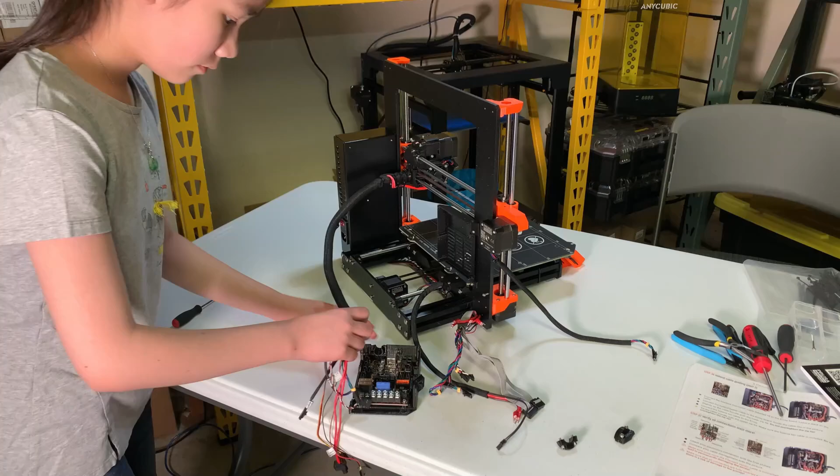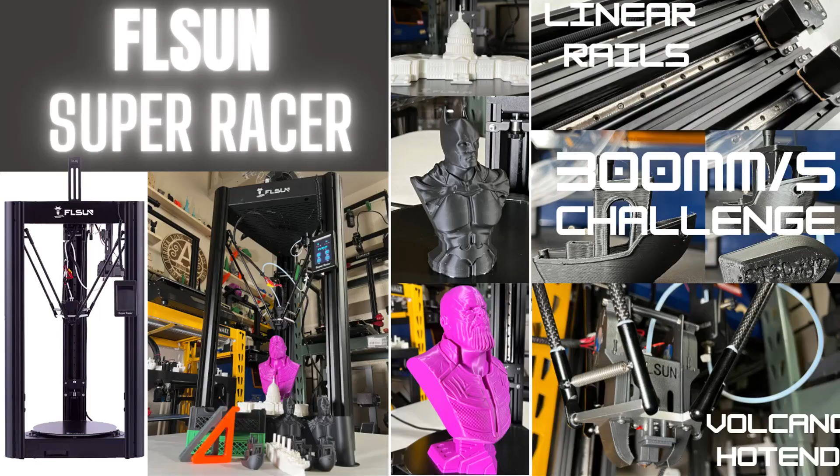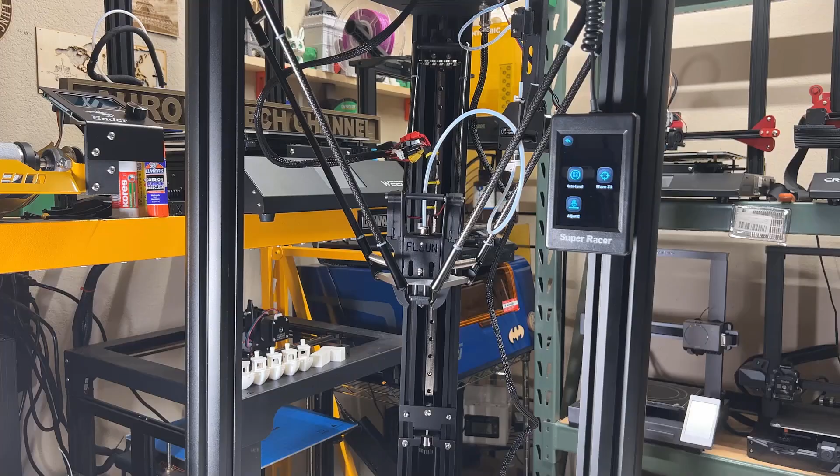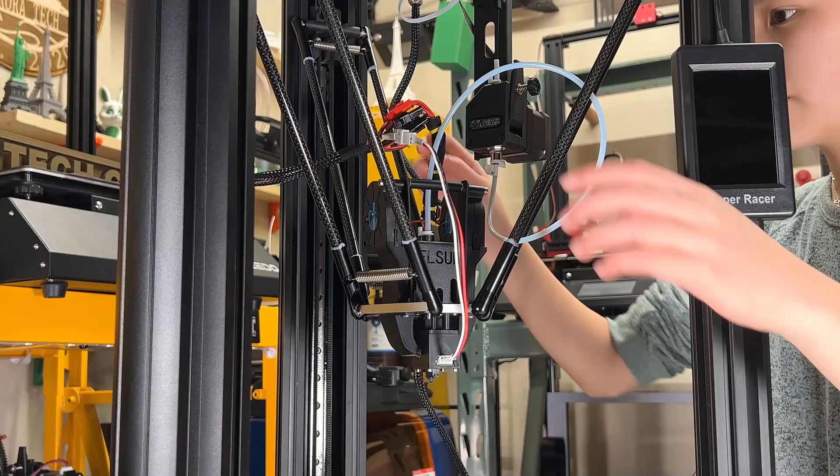Today, I'm going to test out the FLSUN Super Racer, which is a Delta 3D printer that comes with some really good hardware, including linear rails on all X, Y, and Z axes, a BMG-style dual-gear extruder, a dual cooling fan, a volcano-style hotend, a DWIN capacitive touchscreen, a removable auto bed leveling sensor, a filament runout sensor, a 32-bit board, and TMC 2209 silent stepper drivers.

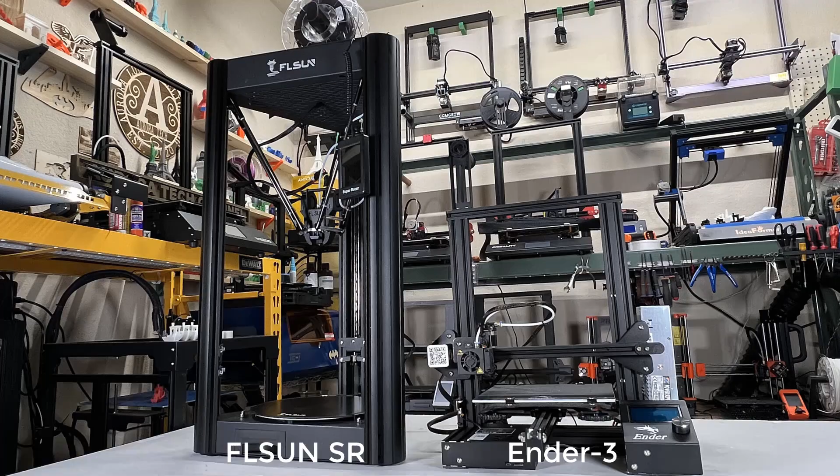The diameter of this print bed is 260, and the maximum Z height is 330 millimeters. The machine is almost 1 meter tall, and it's an overall really interesting looking printer.

As this is a Delta printer, the main reason we want a Delta is to be able to print fast. So we normally won't see a direct drive extruder on a Delta, as we always want the print head to be lightweight in order to print fast. This means that not adding the extruder and the stepper motor to the print head of a Delta is a good idea.

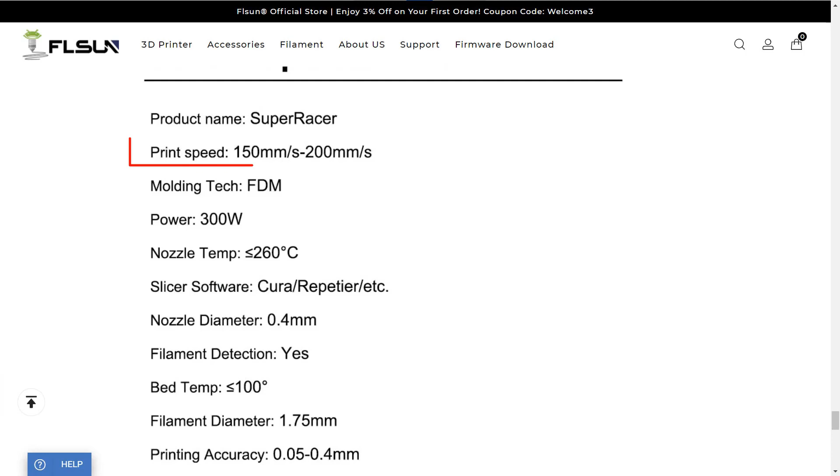The manufacturer claimed the normal printing speed of this printer is 150 millimeters per second, and it can even print at 200 millimeters per second. I will push this printer over its limit to 300 millimeters per second and see how it handles that.

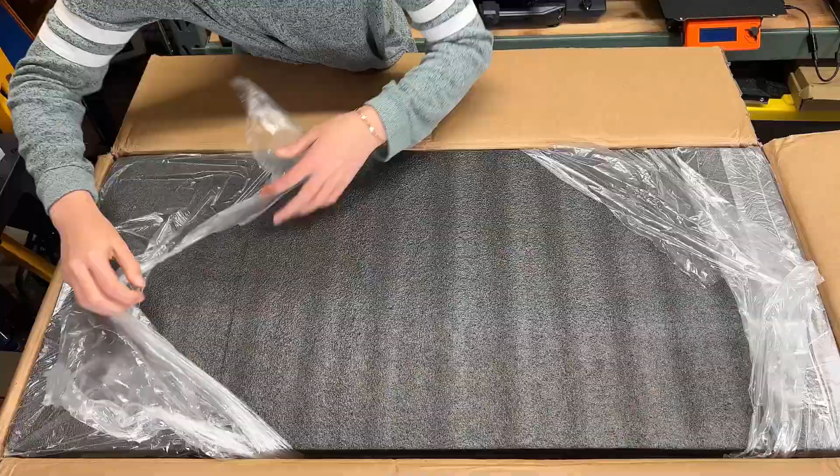We have the base, the top, a touchscreen, 3 long extrusions with linear rails, the extruder, hotend, bed leveling sensor, filament holder, 3 sets of parallel arms, and some tools.

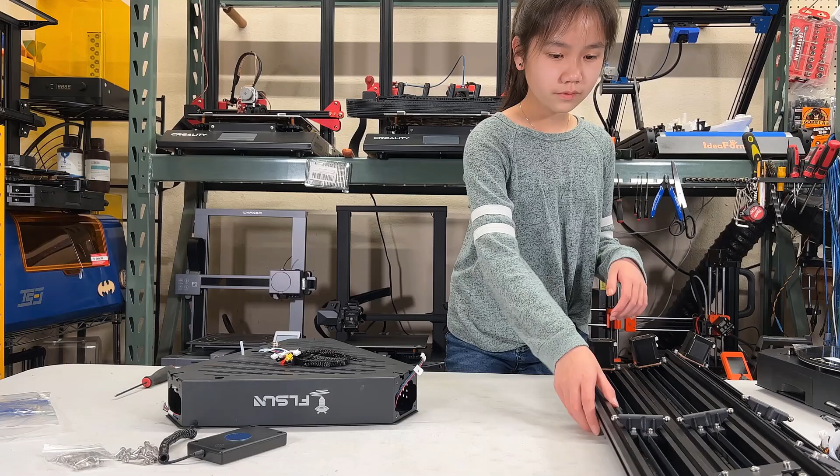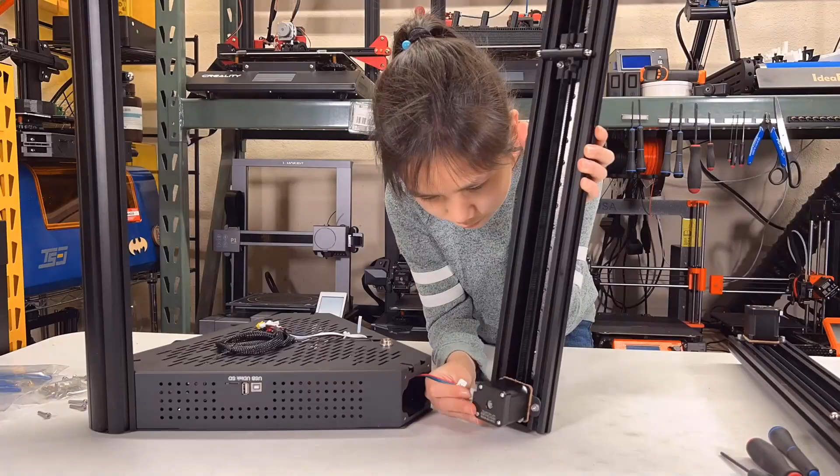First, we will install the long extrusions at the top in an upside down orientation. These axes are labeled as X, Y, and Z, but since they're using the same stepper motor and linear rails, they should be the same no matter which one goes to which. However, I will just follow the label and use 4 screws to secure each corner.

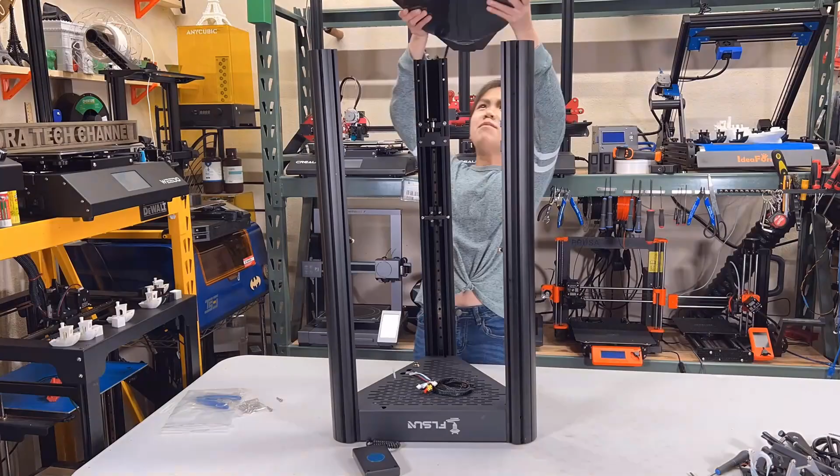Next, put the base with the print bed at the top. We are still working on this with an upside down orientation. Use another 4 screws at each corner to secure the extrusions on the base.

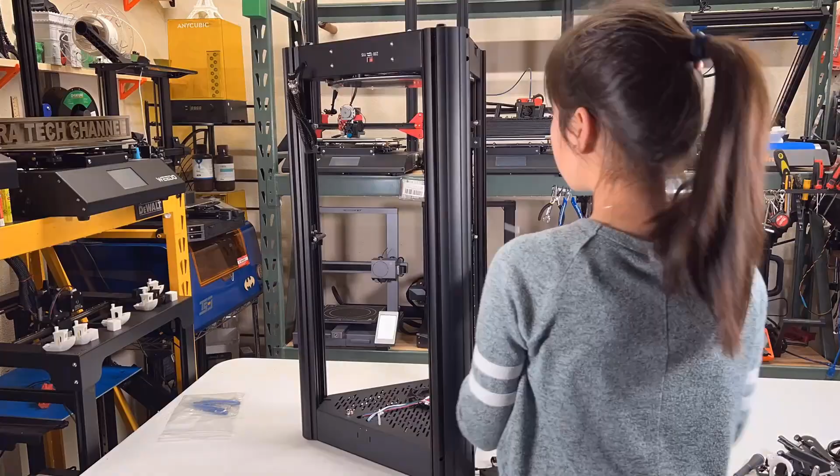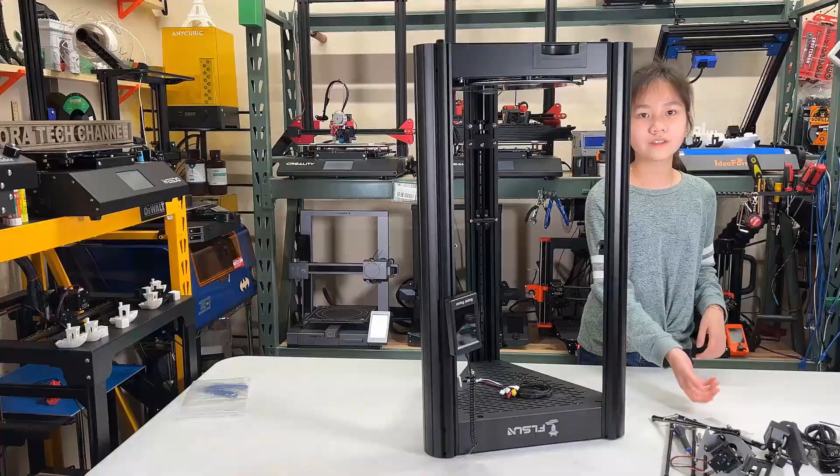Then, slide in the touchscreen mount to the slot in the extrusion on the left. Use the screen to check and make sure the cable is long enough without being stretched too much. Now, we can flip it back to the normal orientation.

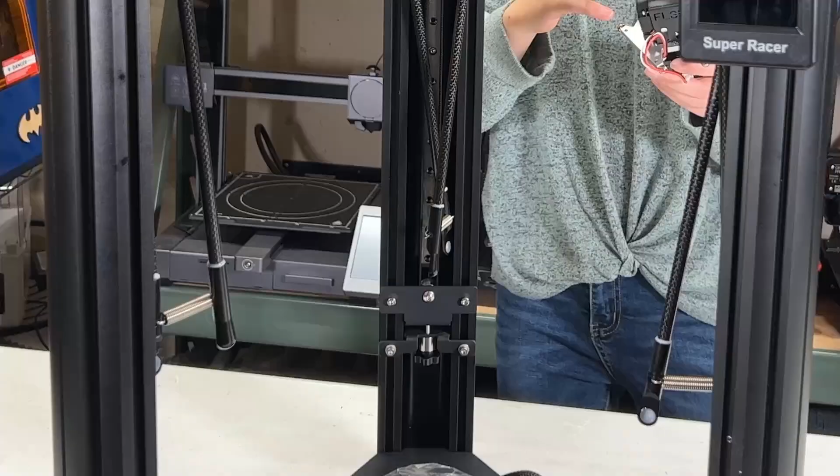Attach a set of parallel arms to each axis. Just snap it in, no screws are required. Grab the print head and snap the other end of the arm on it. It should be able to move freely.

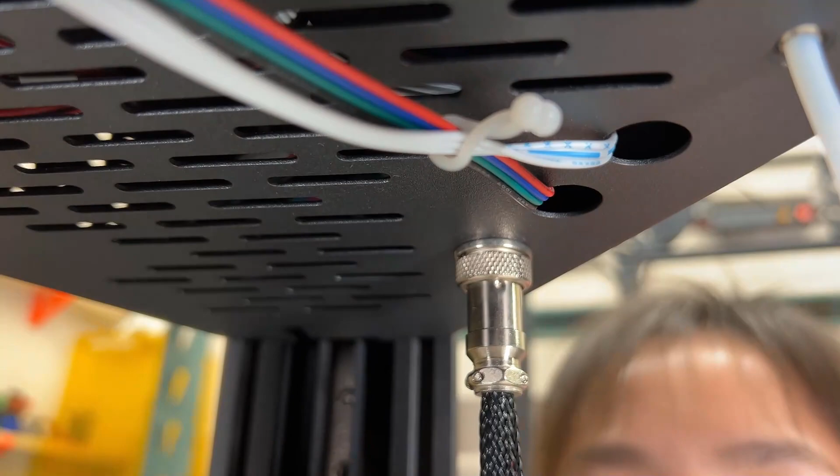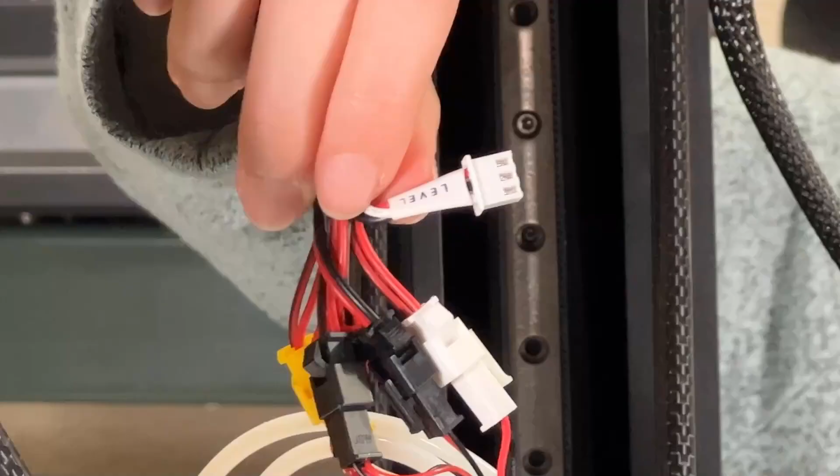Next, connect the cable with the long black sleeve from the base to the top and secure it. Connect the set of cables from the top to the print head following the color on the connectors. Red is the heat cartridge, yellow is the thermistor, the 2 black cables are for the dual fan, the 1 white cable is for the heat sink fan, and the final cable remaining with the level label is for the bed leveling sensor. This sensor is only required once in a while when you do auto bed leveling.

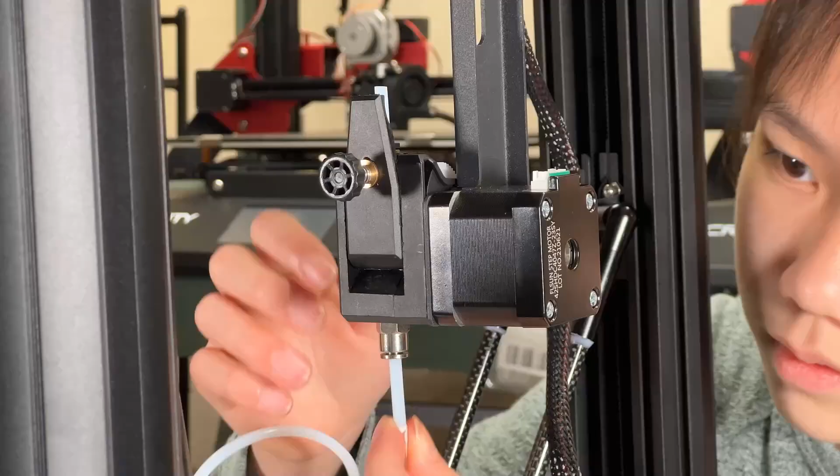Then, hang the extruder and filament sensor assembly on the right side of the frame and secure it with 2 screws. Connect the Bowden tube from the print head to the extruder and push it in all the way, making sure the label touches the metal coupler. Connect the cable of the filament sensor, followed by the extruder stepper motor.

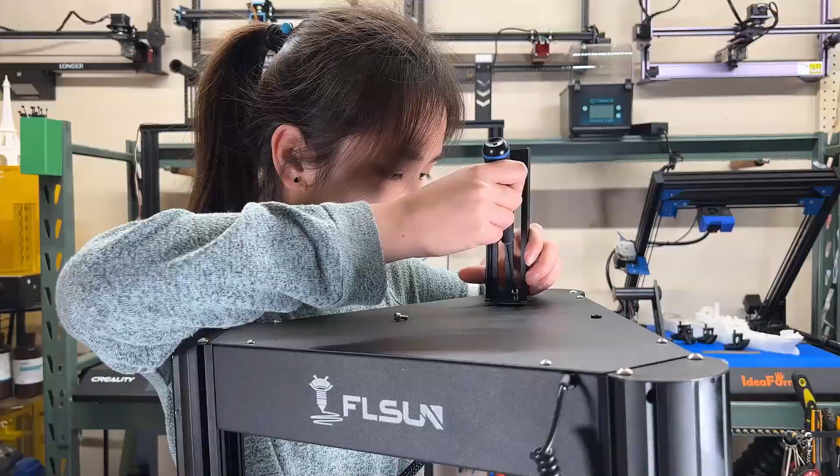Mount the filament holder at the top, load some filament, check the voltage, and we can now turn on the printer. The menu looks pretty nice.

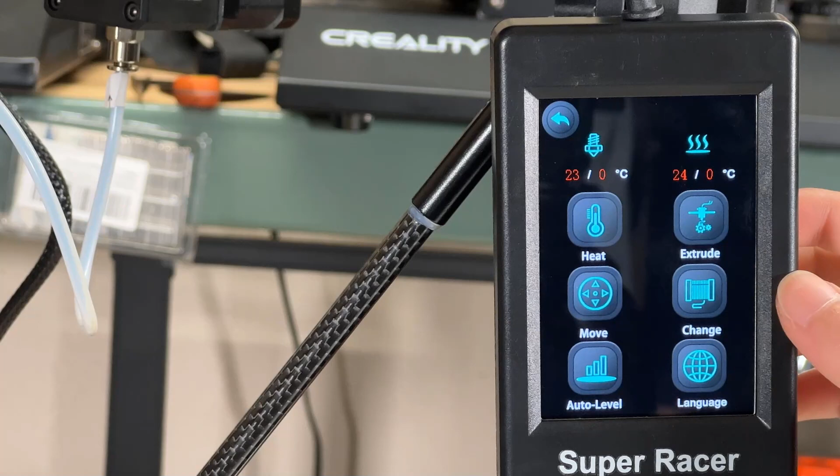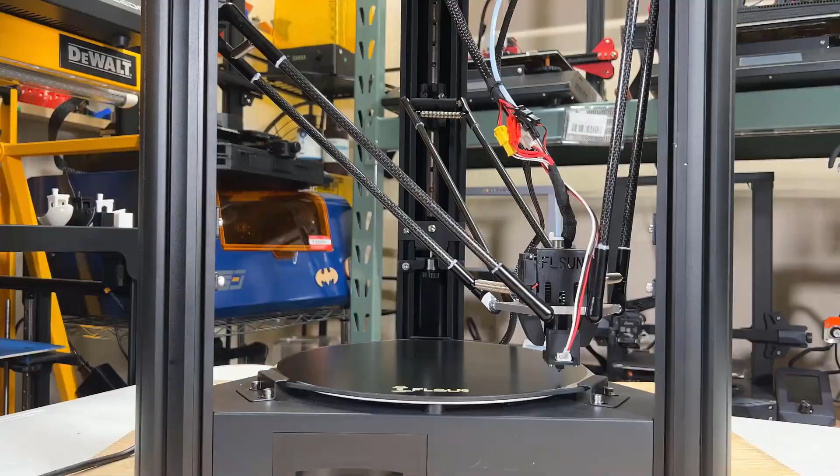Let's start with doing auto bed leveling. Go to Tools, Auto Level, and select the Auto Level button again. The sensor is already connected, so select Yes to start. It's going to probe the center and the 3 points near the X, Y, and Z axis. Then it homes itself again and probes 21 points on the bed.

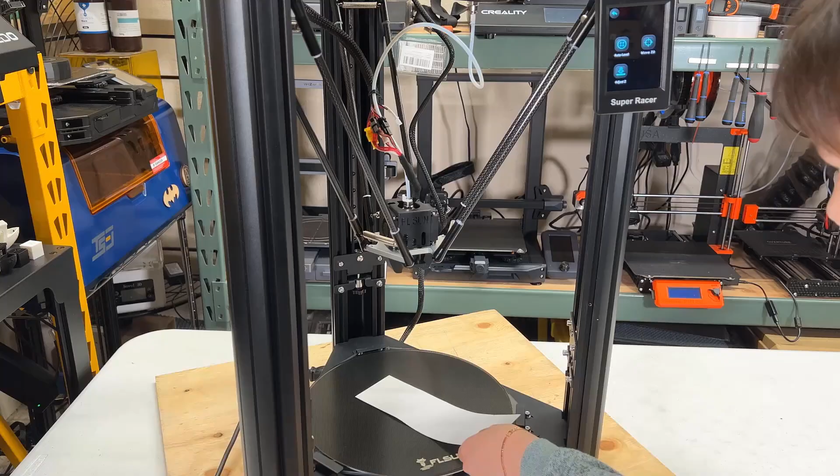We can now remove the bed leveling sensor and adjust the Z offset. Press Move Z0 and the print head will move to the current 0 position of the Z axis. As the nozzle is too far from the bed, press the Adjust Z button, do the paper test, and keep moving the nozzle closer to the bed until it slightly scratches the paper. Then select Save to save the Z offset.

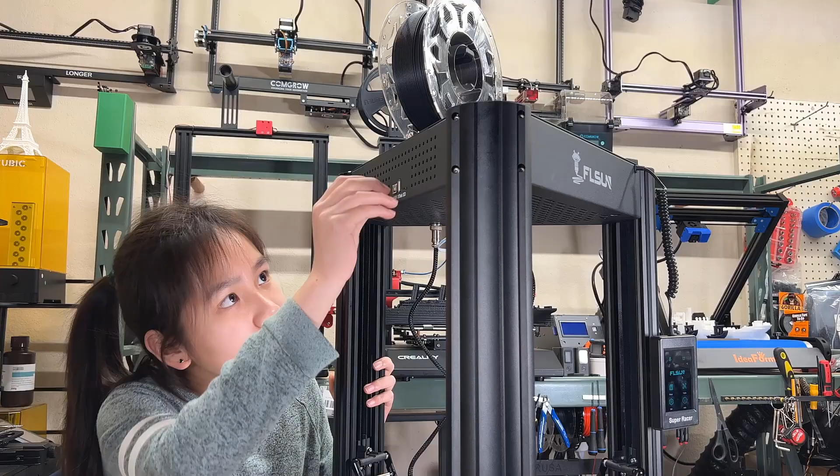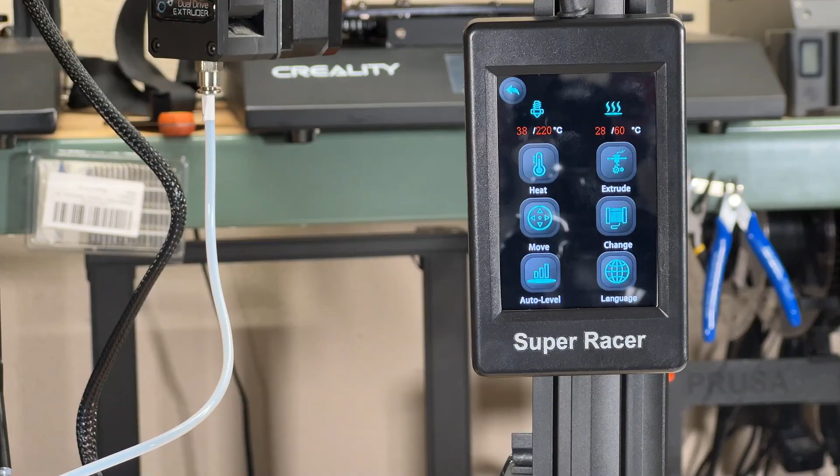Let's insert the micro SD card and prepare for our first test print. Select Tools, Heat, and PLA. It will heat up the nozzle to 220 degrees Celsius, which is 20 degrees higher than normal, but as we want to print at 150 millimeters per second, we need a higher hot end temperature to melt the plastic fast enough to keep up with the speed.

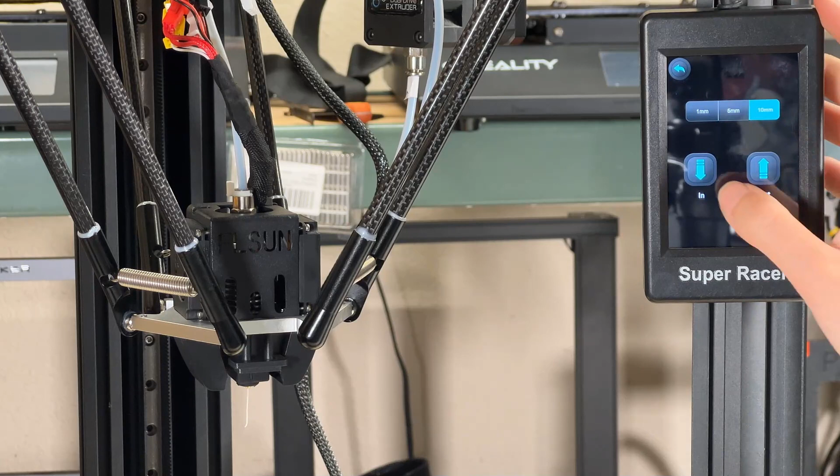As I already inserted some filament, I will just select the extruder and press the in button a few times. Okay, the dark filament is coming out from the nozzle. Let's see what Gcode files are available on the micro SD card. There is only one testing Gcode, and I will just print it to make sure everything is working.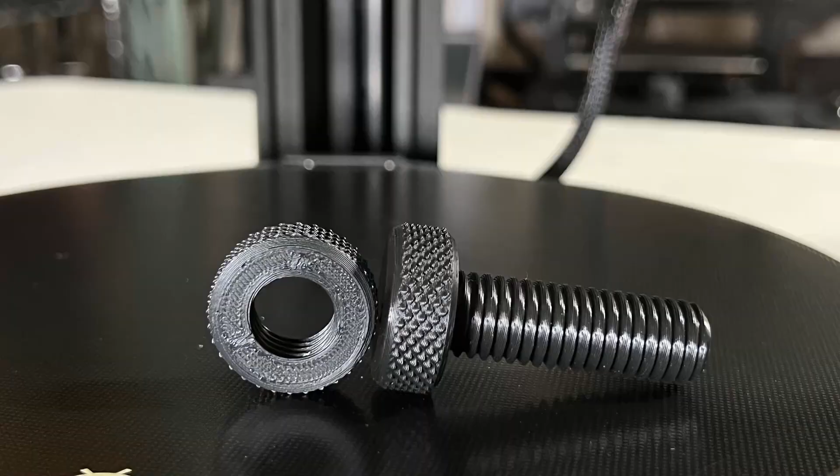It's a set of bolts and nuts. It took 40 minutes to finish, and they fit together very well.

Next, I will go to my computer to set up this printer in Cura. Select Add Printer, Non-Network Printer, and we have FLSUN and the Super Racer here. Let's start with the calibration cube.

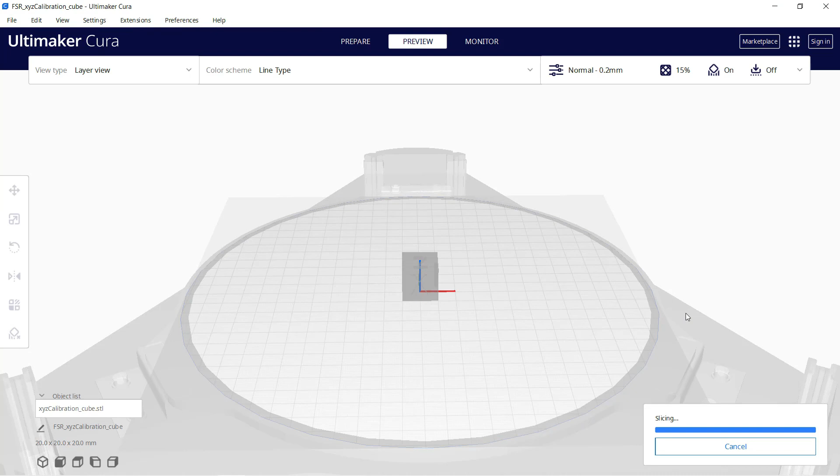Just use the default profile, except we don't need support. The print speed is 150 millimeters per second, with the first layer at 25 millimeters per second. Everything else looks fine, so let's print it.

The print head is moving fast, and the screen is also showing the real-time print speed.

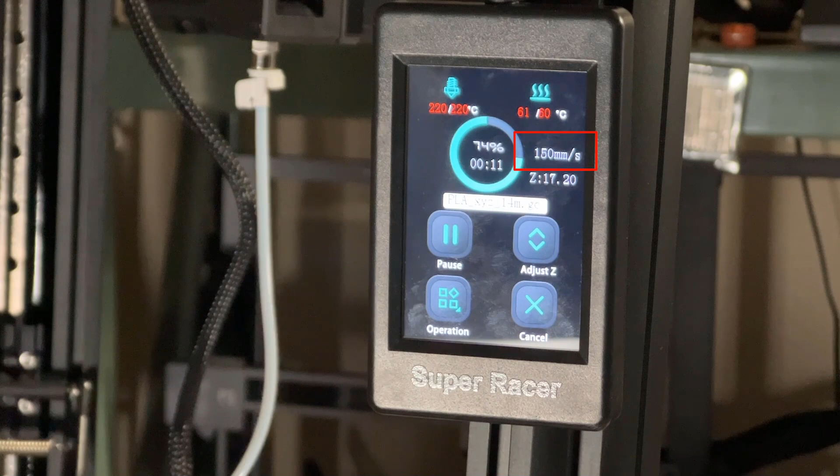Let's compare the one printed with an Ender 3, which used 30 minutes, and the Super Racer 14-minute cube. There is some ghosting on the Super Racer cube, as we normally don't print at this high speed if we have text on a surface. Besides that, the layer lines are looking better than the one printed by an Ender 3.

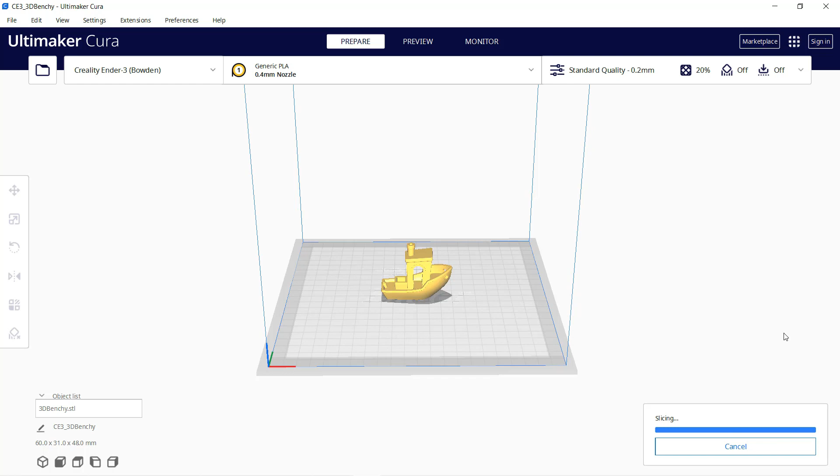Then, I will print a 3D Benchy with the same default profile. It only takes 45 minutes, which is very fast compared to an Ender 3 default 50 millimeters per second profile, which would normally take 1 hour and 50 minutes. Let's see if this printer can really complete the print in 45 minutes.

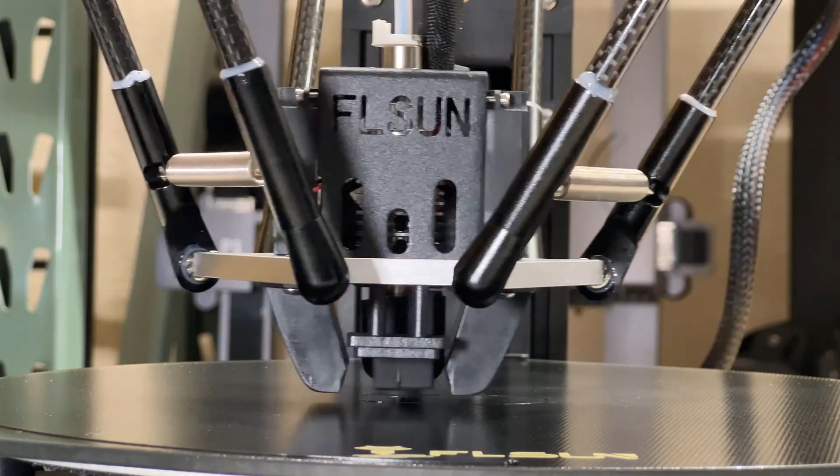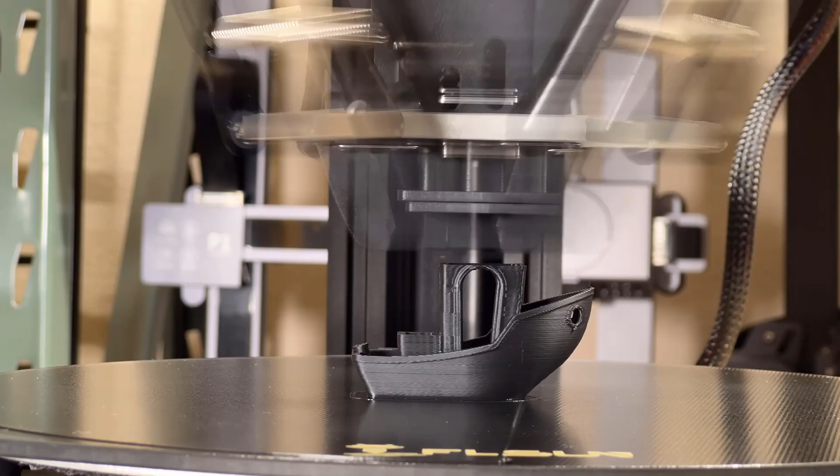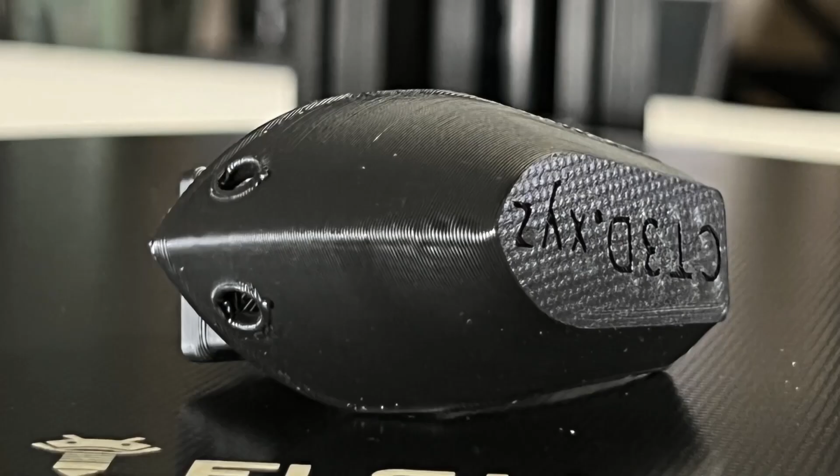It's quite impressive, taking exactly 45 minutes, and it's a very decent Benchy. The only minor issue I can see is that the cooling of this part is not enough. As you can see, the stock fan duct is a little bit too far from the nozzle and is blowing directly on the silicone sock instead of the nozzle. It would be better to extend the length by 2 millimeters and move it even closer to the nozzle.

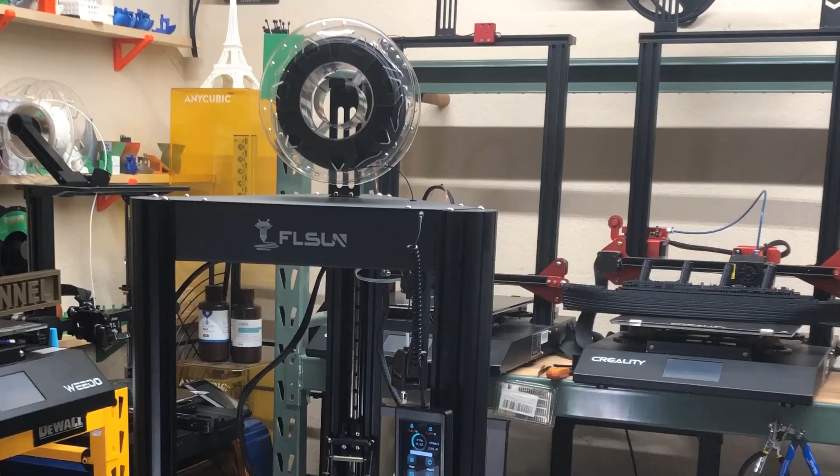Another thing I would like to print is the filament roll. The super simple filament holder works okay, but I would rather let the filament spool sit on a round-shaped roller, so I will print a set of fan ducts and a filament roller and see if they work better.

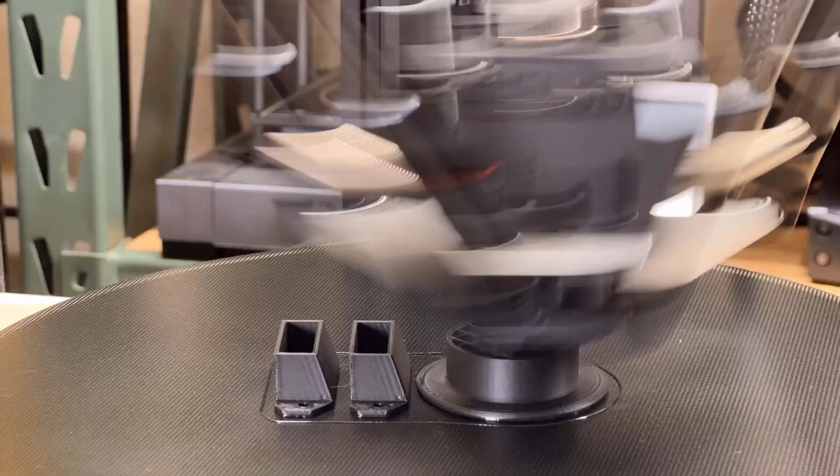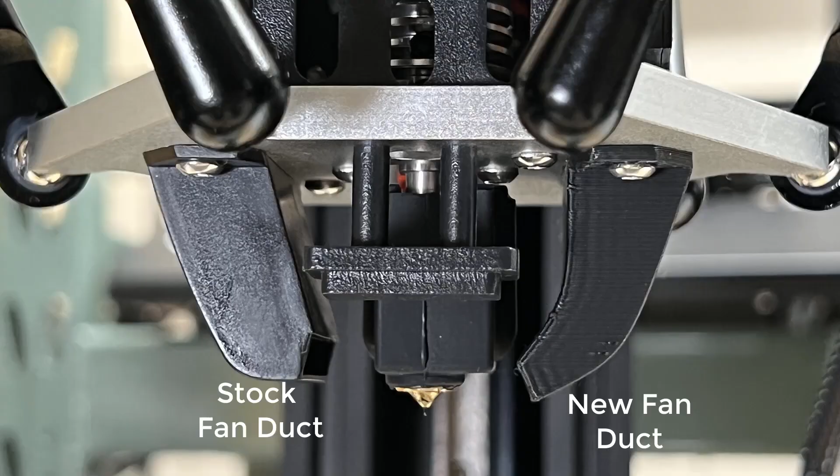The length and the angle of this set of fan ducts looks much better. I put one of them on the print head, and you can see the angle and height is more optimal than the stock one. The filament roller also seems better. I will replace both fan ducts and reprint the Benchy.

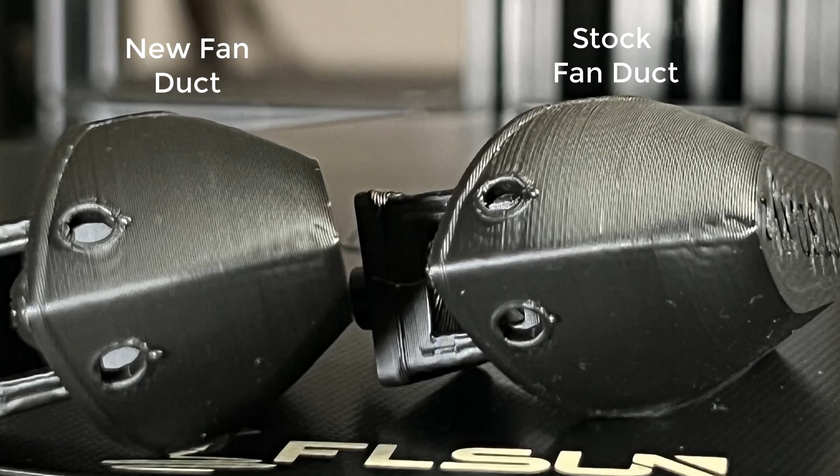Both Benchies look really nice. When you look at the front part, the cooling is much better now. I will keep this setup and do more test prints.

Next, I will print this Batman model. Generally, using an Ender 3 to print this model would take more than 5 hours. This Speed Racer only needs 2.5 hours.

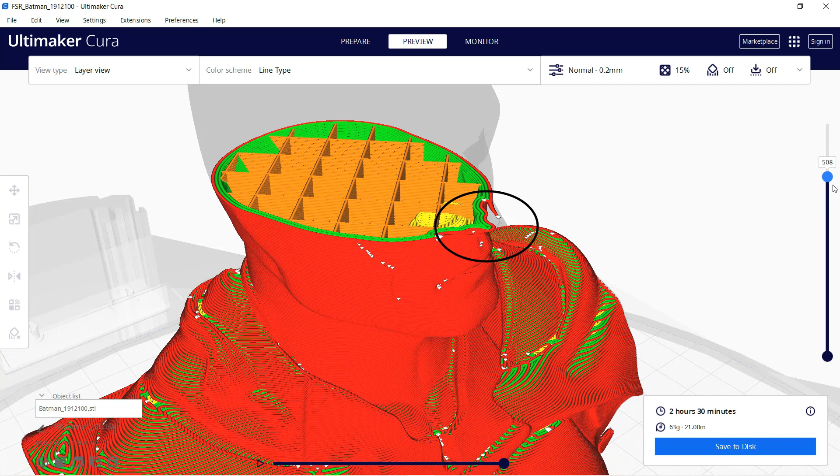This model will be fine without supports, except for the nose. As you can see, this layer will be printing in the air, but let's print it without using support and see how it looks.

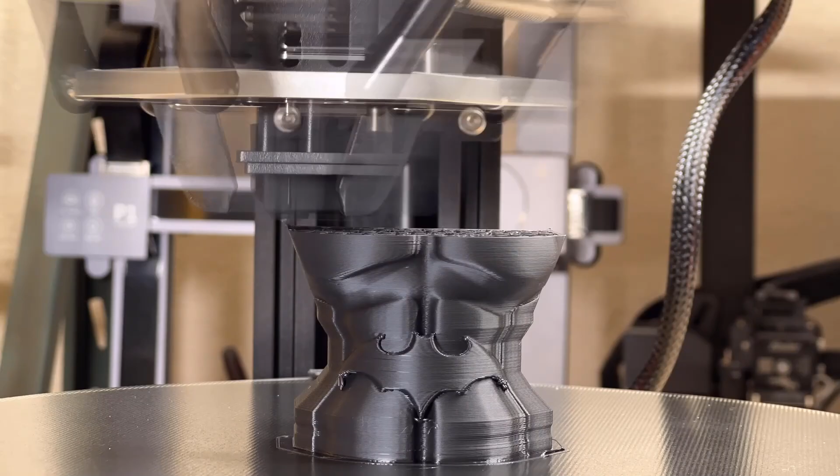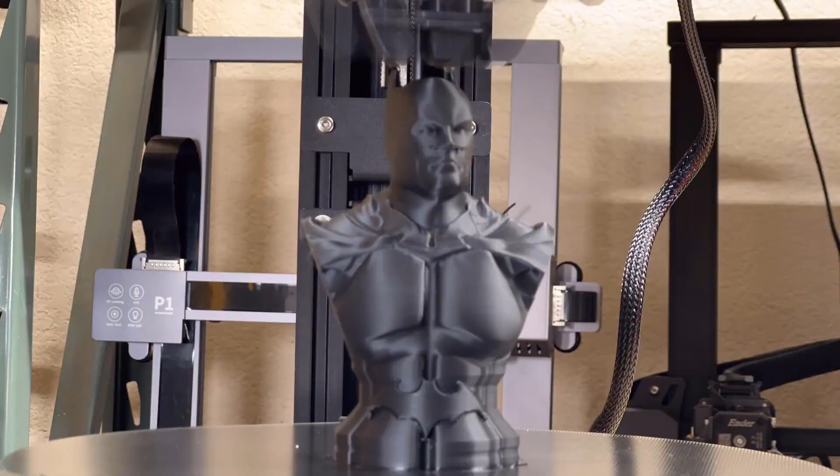The body looks perfect, and the layer lines are really nice as the base of this printer does not move, which can really improve the stability. As expected, the nose is not looking very good as this part was printed in the air, but overall this model is still a pretty nice print.

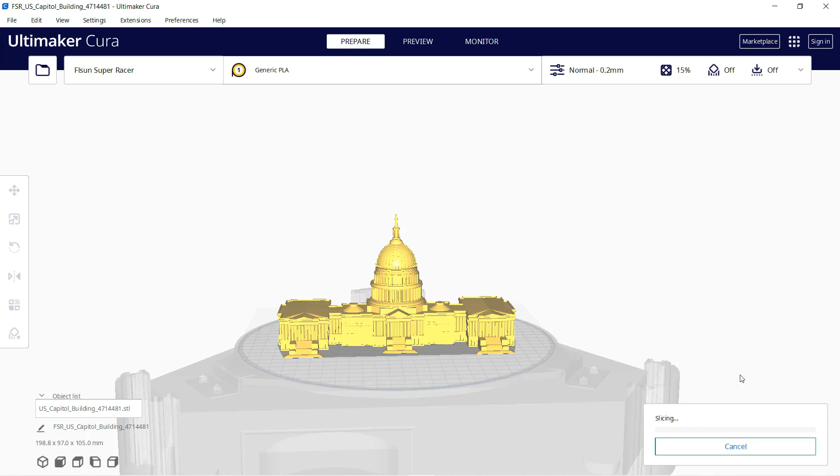Then I will print the Capitol Hill. This model will take 6.5 hours even with this Super Racer. Let's see how much time it takes with an Ender 3.

The print bed of the Ender 3 is not large enough, so I will reduce the size slightly to 98%. It still takes almost 11 hours. So let's switch back to the Super Racer and slice this file.

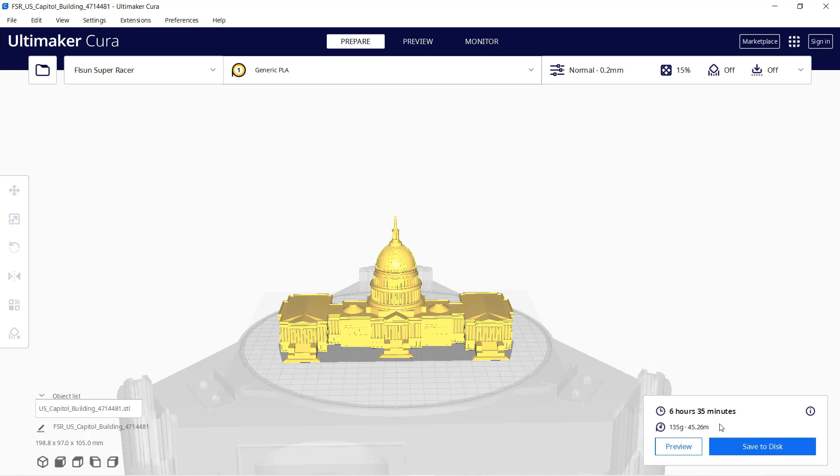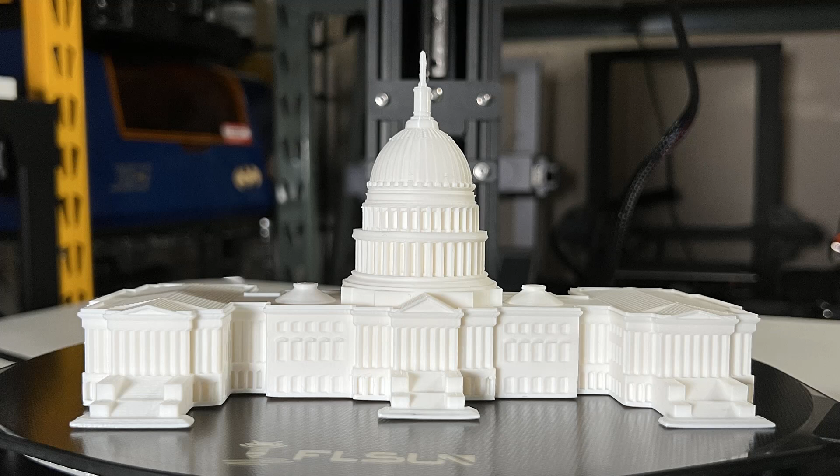With a model that is as wide as the Ender 3 print bed, just using 6.5 hours to print with this print quality is very impressive.

Afterwards, I will print this Thanos model, which will take longer than 29 hours on an Ender 3, and I never had the patience to wait for that, but using the Super Racer can cut the print time by more than half.

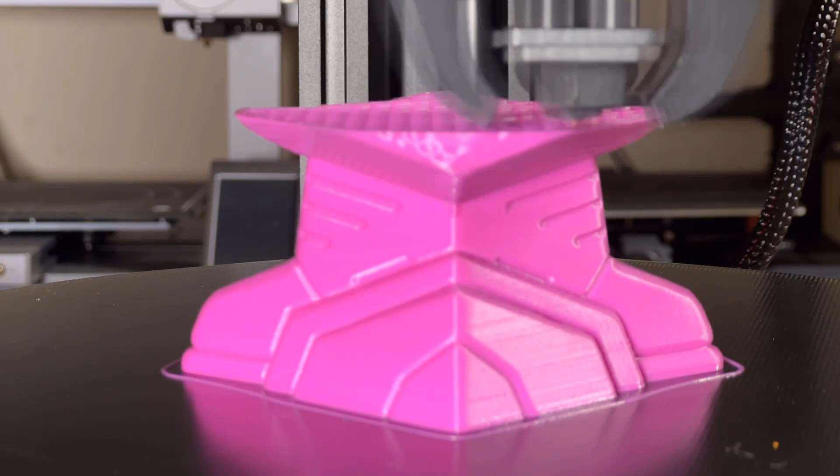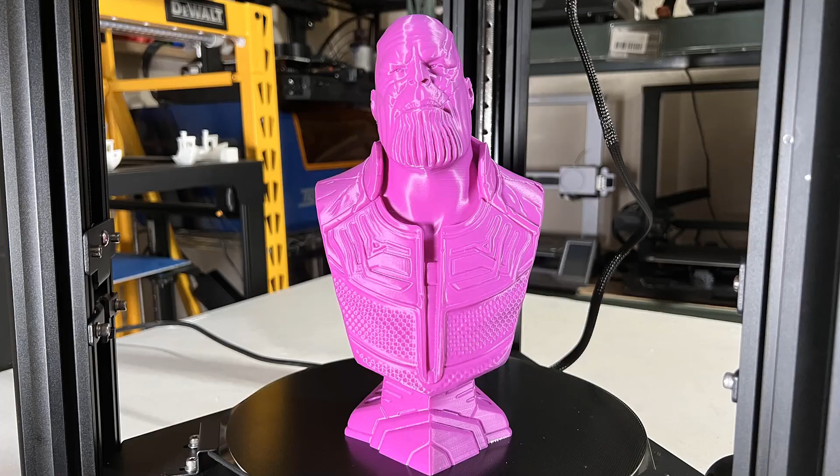This print is beautiful, even though Thanos is very ugly. The layers, the body, and even when zooming in this close to the head are all just perfect.

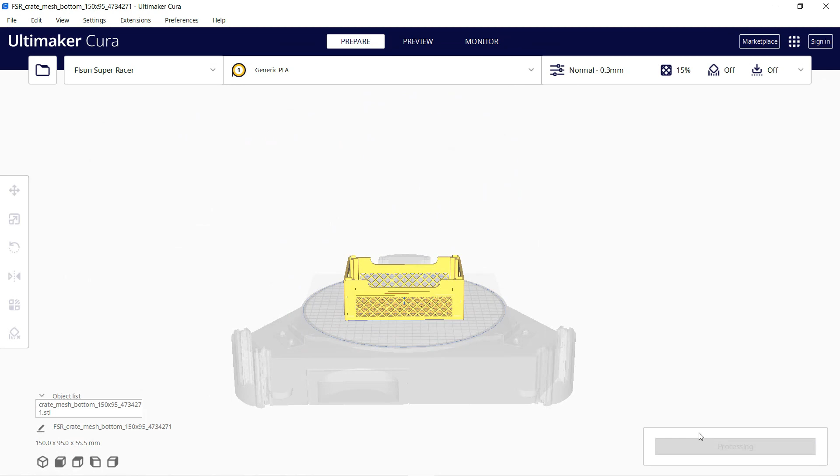Additionally, I always wanted to print a lot of crates to tidy our workspace. This model requires more than 8 hours on a regular printer, even when printing at a 0.3mm layer height. With this Super Racer, it can finish in less than 4 hours.

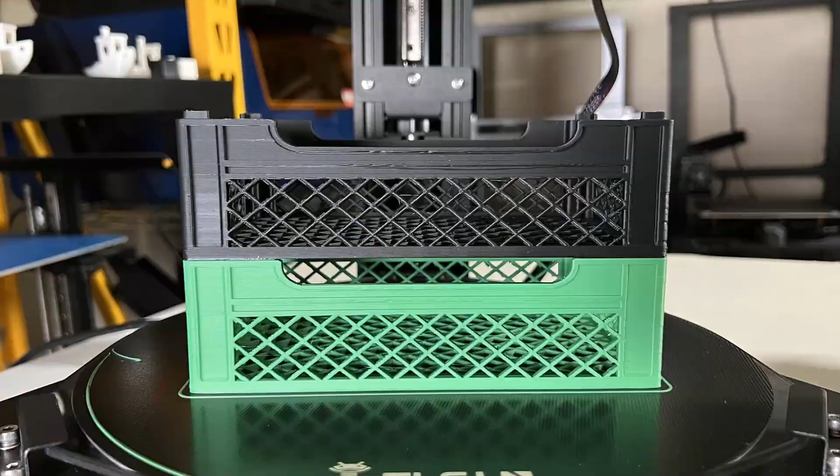The retraction is pretty good as a Bowden setup. There is only minimal stringing, and I'm very happy with the result and print speed.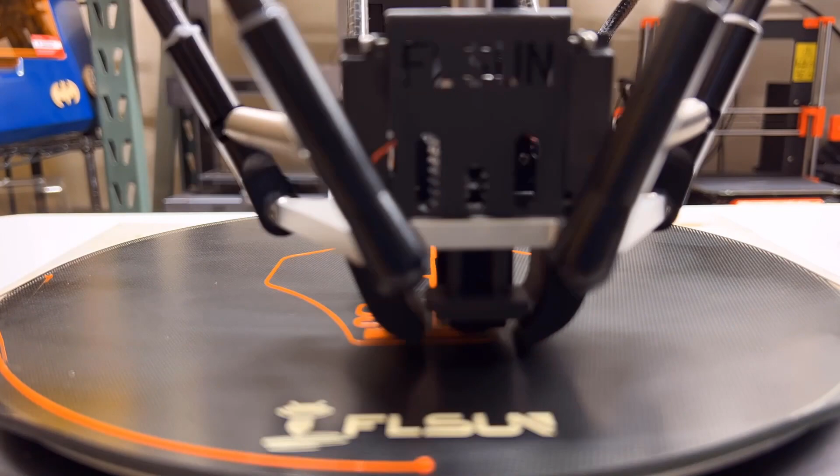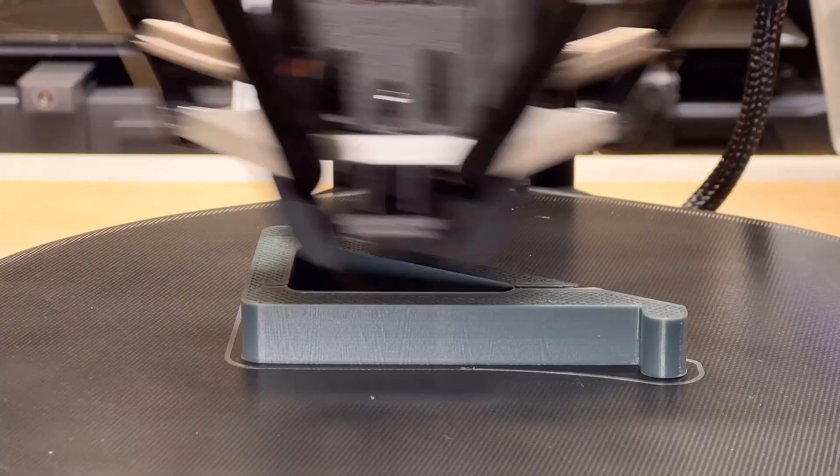Besides PLA, I also tried to print PETG at the same high speed, but as PETG and ABS are not suitable for high-speed printing, after a few failed prints, I slowed it down to a normal 60 mm per second. Printing ABS on this glass bed without using glue is still alright.

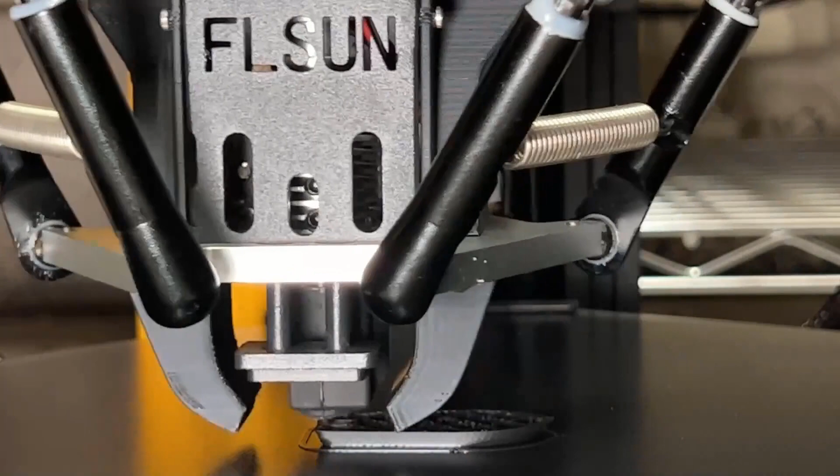There is some warping at these two corners, but the overall print results of both PETG and ABS are great. Finally, I want to push the machine to its limits and even a little bit over its limits. I changed the stock 4010 blowers to more powerful 5015 blowers. Since the 5015 blowers are thicker and may touch the parallel arm when moving to the edges of the bed, I printed 2 adapters to raise them.

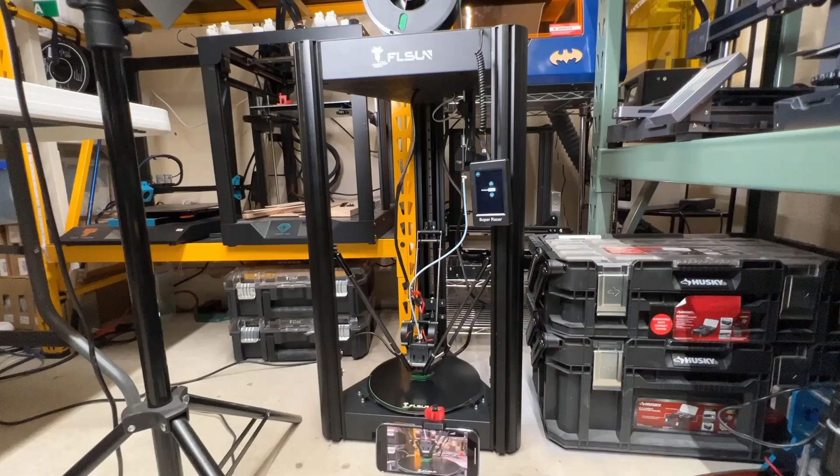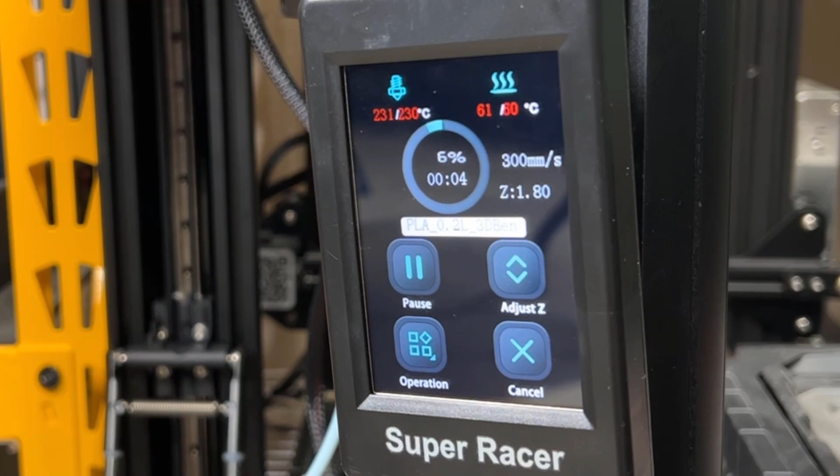I also put the printer on the ground to make sure it is sitting on something perfectly flat and sturdy. I tried it with different speeds, starting with 195 mm per second, then 225, and finally 300 mm per second. Here are the Benchy's printing at different speeds. The one printed at 300 mm per second still looks pretty good.

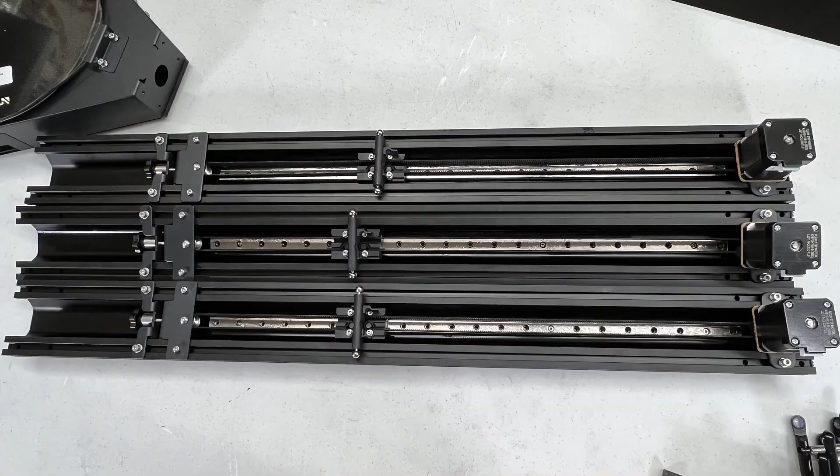The long linear rails on the X, Y, and Z axes run smoothly. The BMG clone extruder and volcano style heated block work pretty well and can print at 300 mm per second without issues. The glass bed is fixed on the base with 3 mounts. This is much better than the swinging bed on other Cartesian printers and results in better stability and beautiful layer lines.

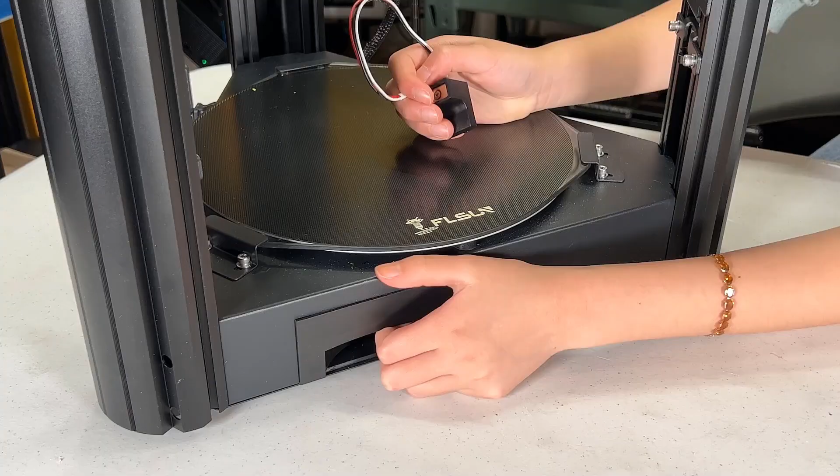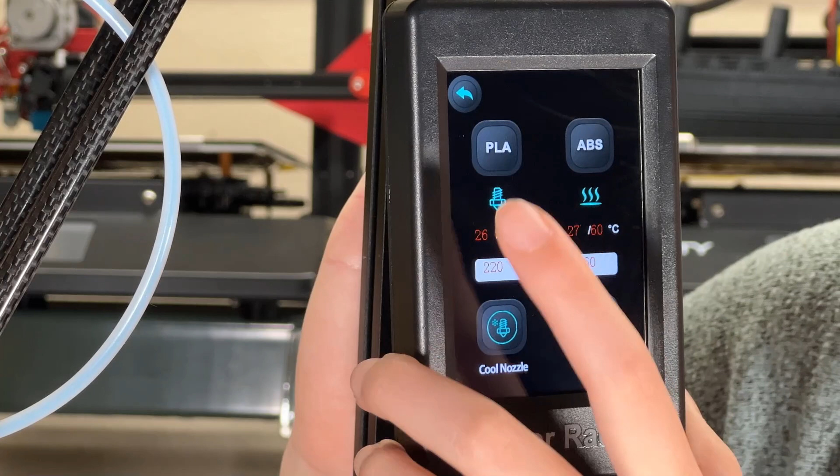The leveling sensor works well. I just leveled it once and printed all these models without issues. As you only need the sensor once in a while, the attachable design is good as it allows you to remove some weight on the hot end for faster printing and just put it inside the drawer when you're not using it. The capacitive touchscreen is better than resistive touchscreens that you see on other 3D printers. It's very responsive. The user interface is one of the best, and the menu structure and button locations are easy to find.

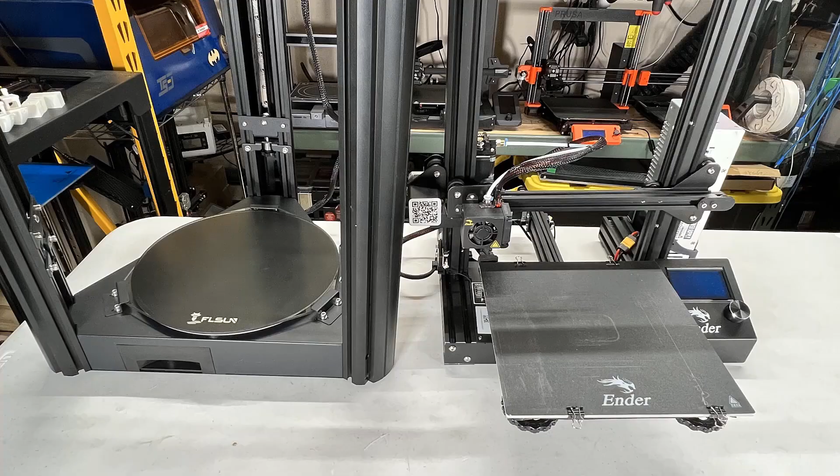As for the cons, a Delta printer requires more vertical space than a Cartesian 3D printer, but the footprint of a Delta is smaller, so it occupies less space on the table.

This printer supports both micro SD cards and USB drives, but it cannot support both at the same time. You need to reflash the firmware to switch from USB printing to micro SD card printing. It's not that hard, as you just copy one file to the root of the SD card and turn the machine back on to flash the firmware, which can be done in about 30 seconds. However, I have seen other printers that can support both at the same time, so I believe FLSUN should also be able to do this.

Finally, the cooling system, including the fans and fan ducts, is not good enough to match the rest of the hardware. After I changed the fan ducts from the stock 4010 to 5015 blowers, it works great. The manufacturer could consider using a better cooling system in the future to improve the overall performance of the printer.

In conclusion, this FLSUN Super Racer is the fastest printer I have ever tested. Its claim to print at 150 or 200 millimeters per second at the maximum is actually very humble. I tried printing with 0.2 and 0.3 millimeter layer height at 150 millimeters per second and didn't have any issues.

I can also get good results printing at a 0.2 millimeter layer height at 300 millimeters per second with a simple cooling fan upgrade. If you are looking for a 3D printer that prints fast with pretty good print quality, you can check out this FLSUN Super Racer. I put the links down below.